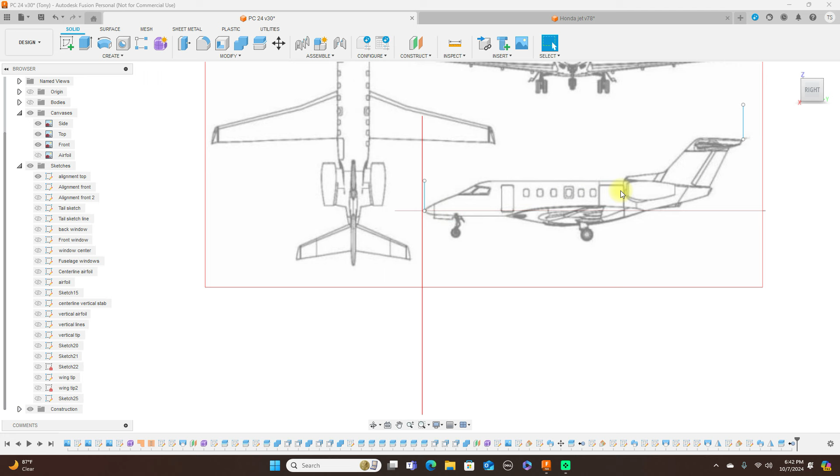Today I'm going to show you the way that I align my 3-view drawings now, instead of the old way that I used to do them. The old way, I would bring in a picture like this and calibrate the side view. Once I get the side view in here, I would calibrate this, then calibrate the top and calibrate the front. Now I don't calibrate the top and the front, so I'm going to show you how I do that.

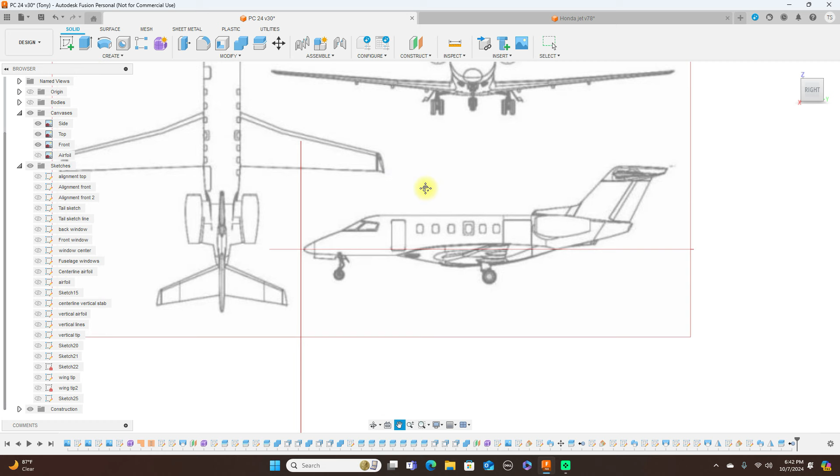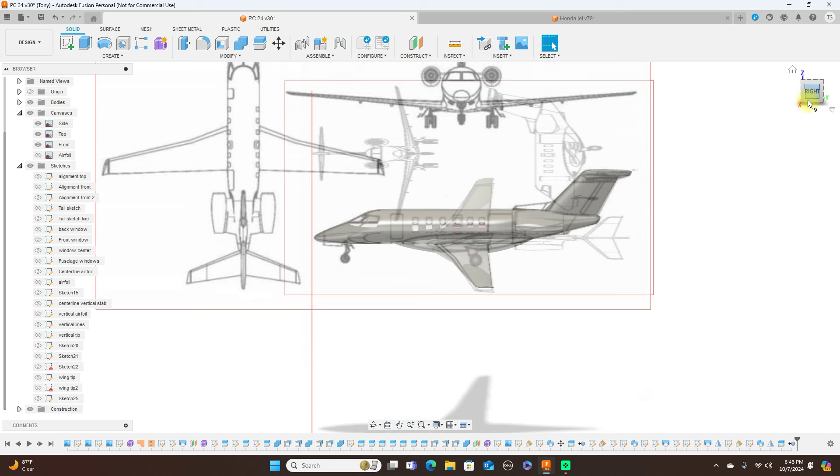Let me show you the difference to being really calibrated, the pictures. Turn the bodies on here. As you can see, this is lined up really well. The top as well, as you can see, is really lined up quite well. And the front. This is the way I do it.

So I turn the canvases off so you can have a look at that. This is a Pilatus PC24 that I've been working on. But anyway, let's go ahead and open up something new here, a new design.

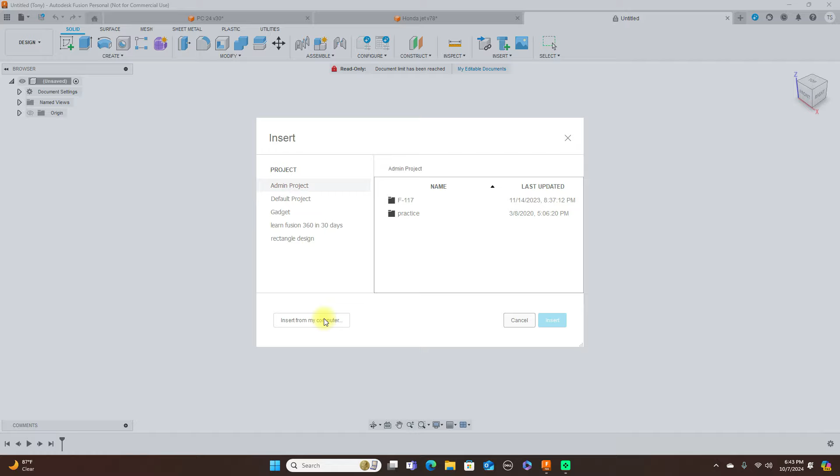And I'm going to insert a canvas here, and it's a picture on my desktop. Let's go ahead and find one to use, something that's not difficult. Let's go ahead and use this A380.

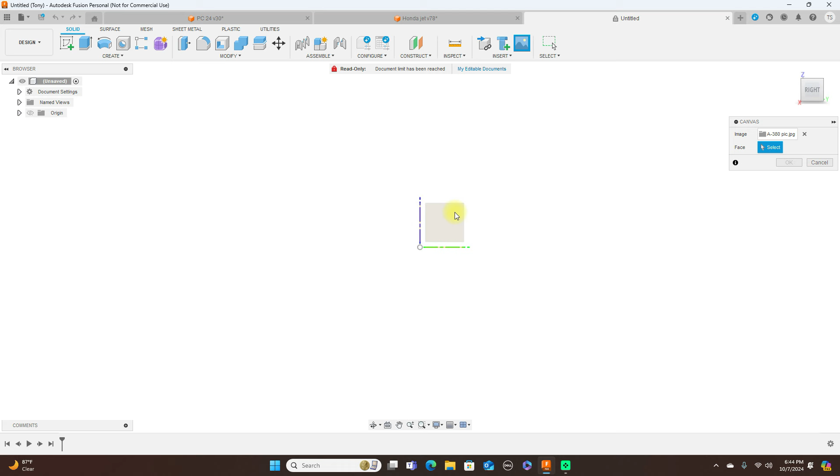And put this on the side view here, and click OK.

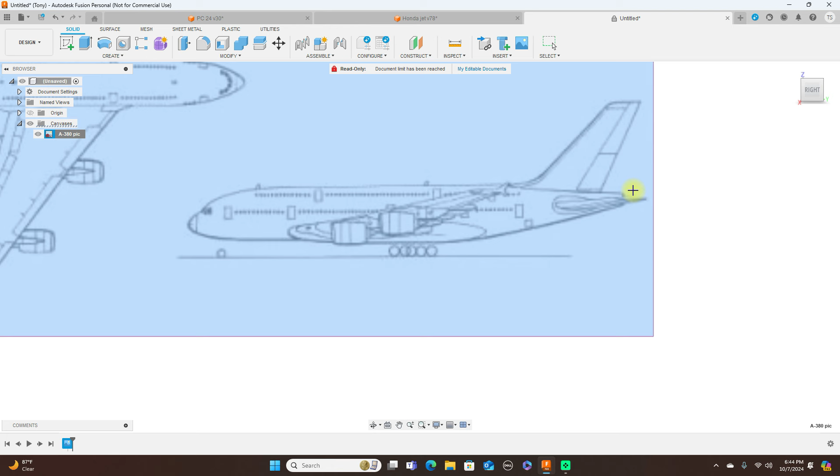Now what I do is calibrate this picture here. I want from here to here to be 2 meters. Actually, I want from here to roughly around up here.

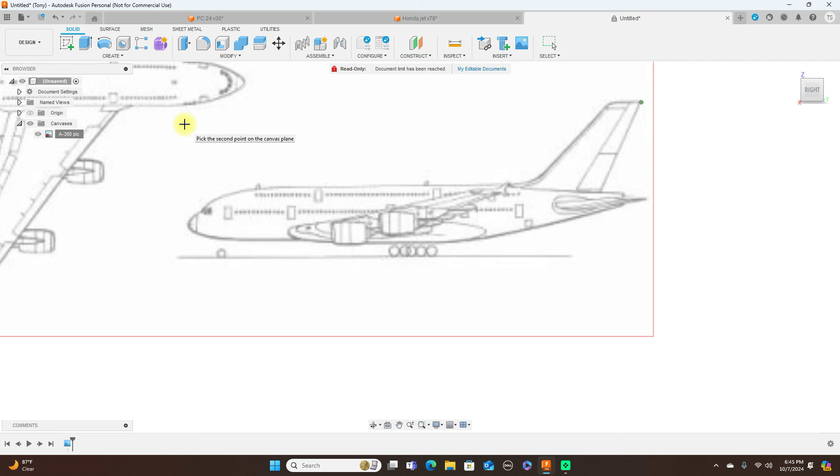You change this, cancel this, do this better. Now I'm going to use this point here and this point here.

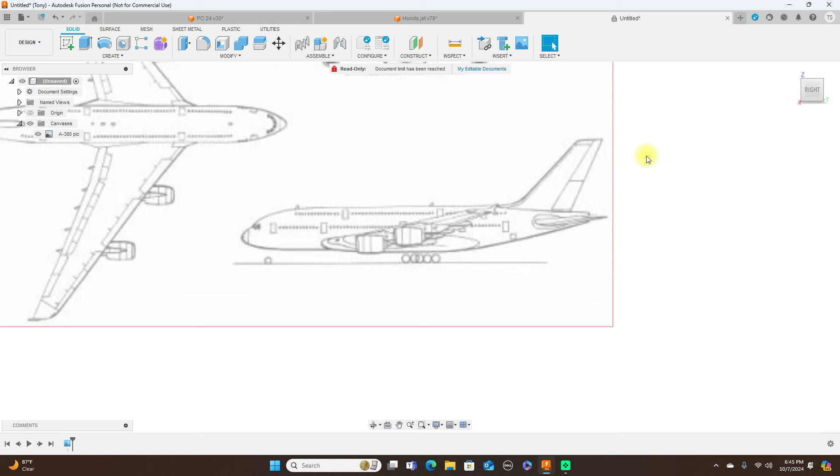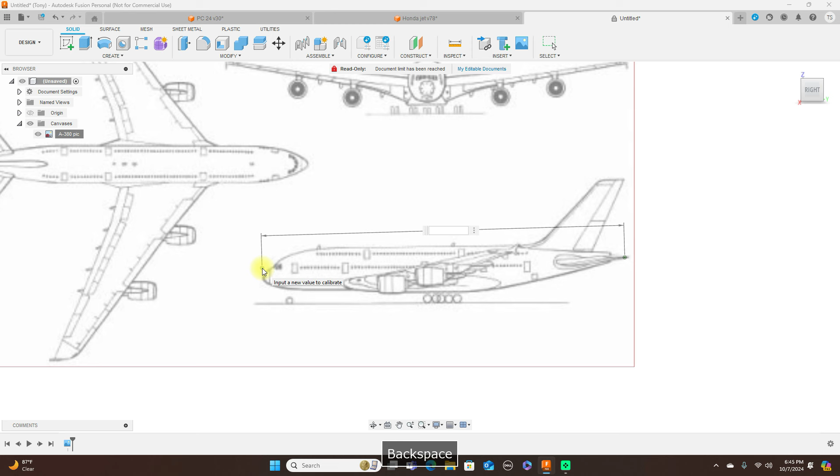And the other parts of this doesn't really matter too much. If you need this to be exactly 2 meters, put some lines in here to make sure it's exactly 2 meters long. But that's the only one that needs to be calibrated, just the first side profile. Just calibrate that.

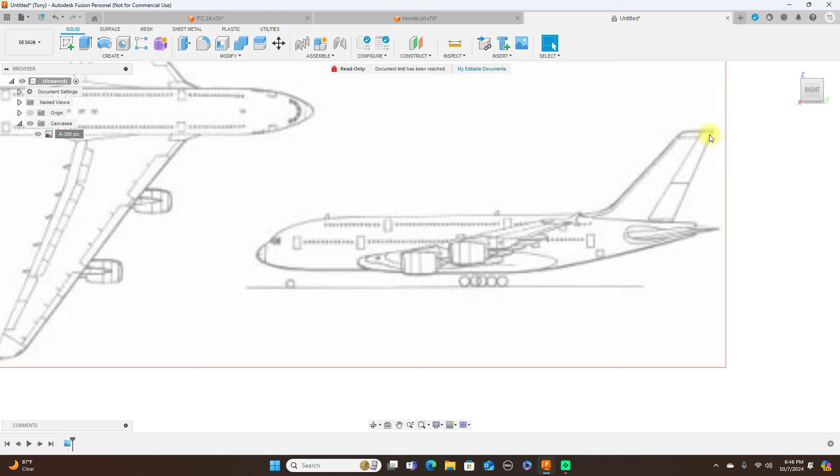Now you have that in here and it's calibrated to be whatever size you need it to be. Now what you do is create a sketch on the side plane here.

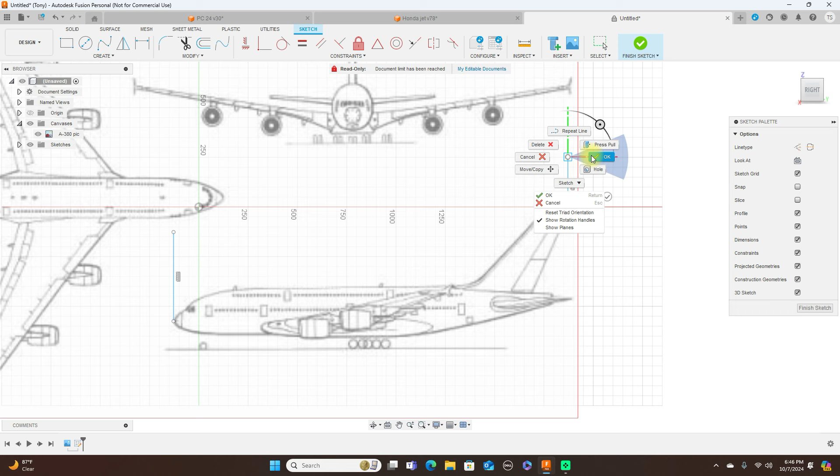Then I'll draw a line from here to here, and I'll do the same thing for the back. As you can see, we have the line that we need.

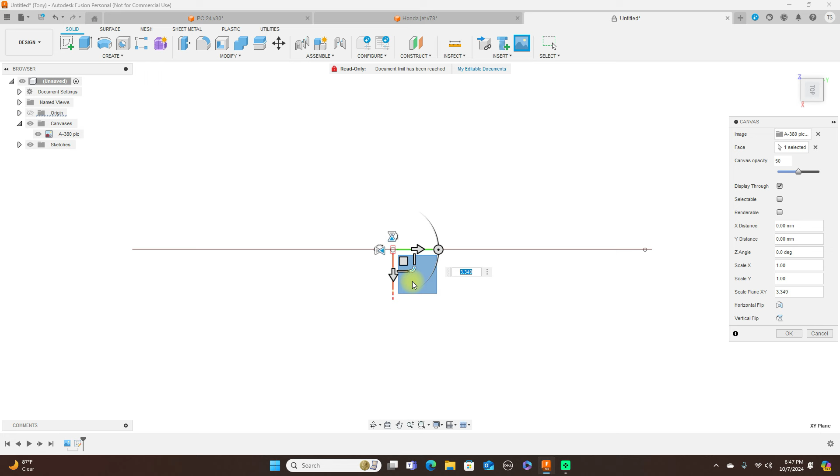Next, I'll go to insert again, another canvas, and that same picture that we used. And drag this out, rotate this.

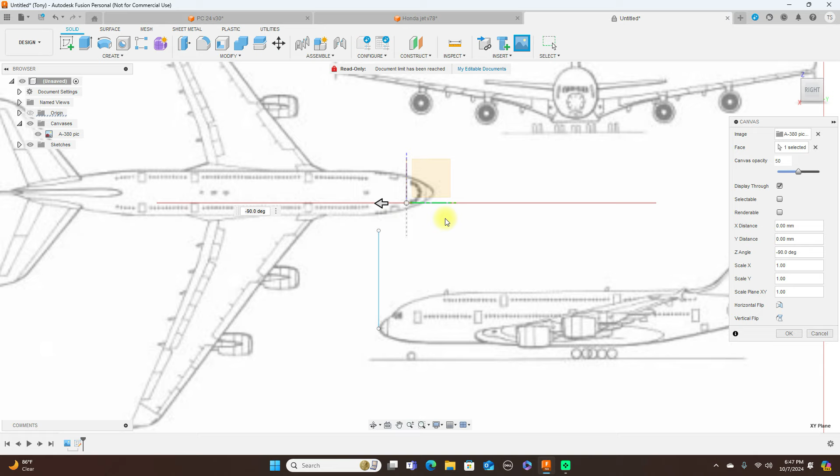And we have a line from here to the back end of it, to there, and there. So that dot and the dot up front.

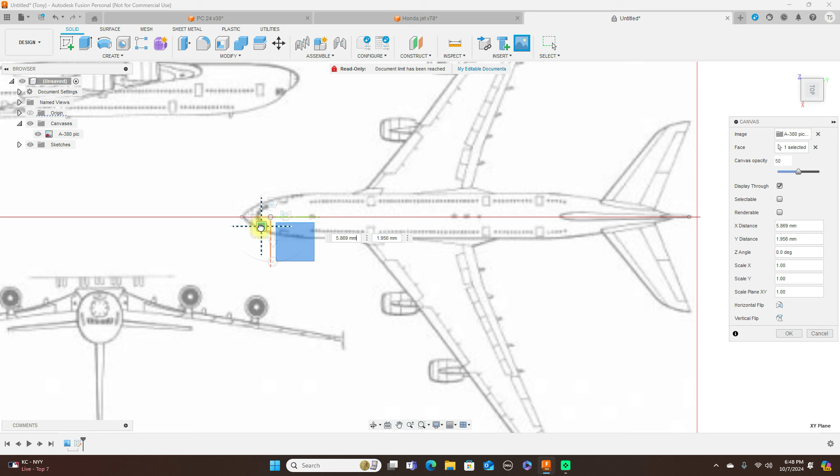And I'll pull this out here and line it up, the two dots there. And click OK.

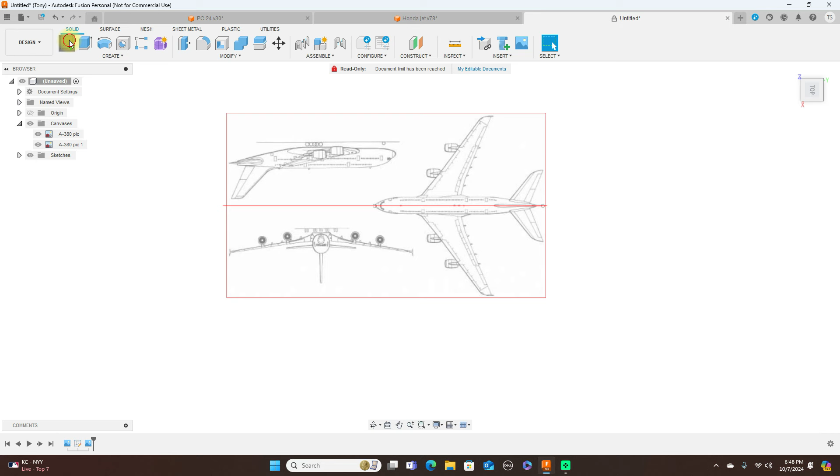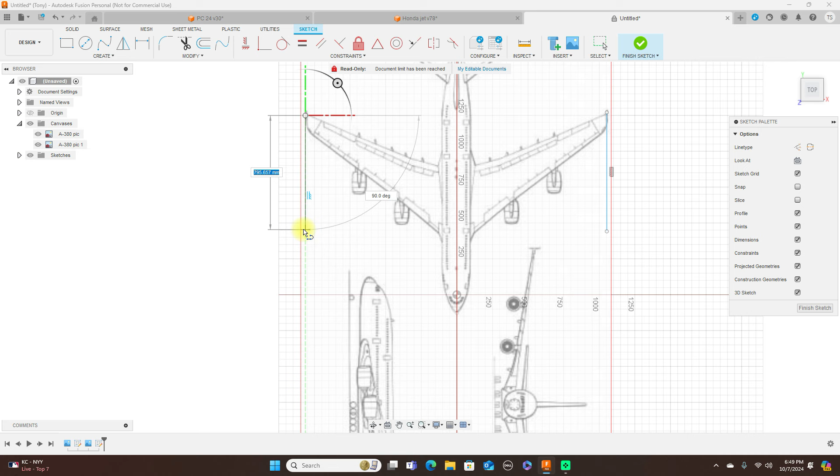Then the front one, while we're looking at the top here, we'll create a sketch on this plane. Again, line, wing, and the same on the other side. Finish sketch.

Look at this from the front, and we have our two dots here. Now we'll insert another canvas.

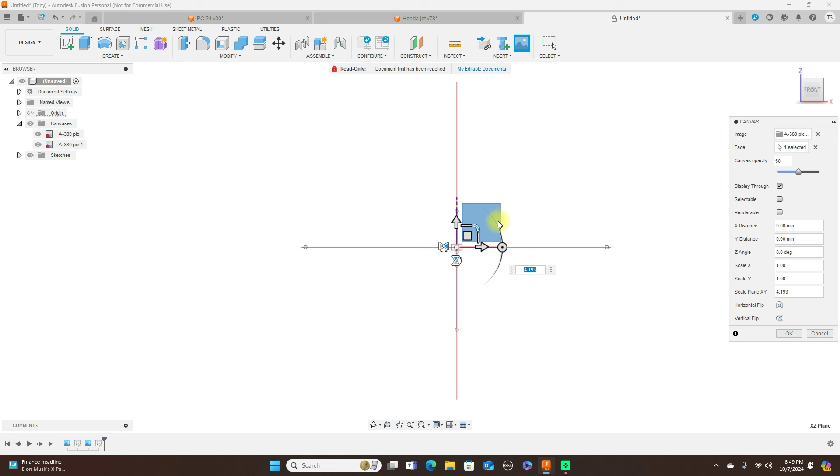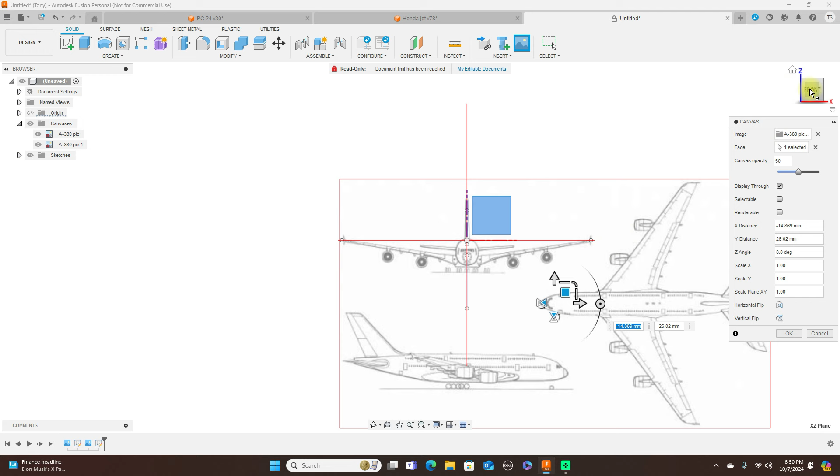This plane here. And that's really close. And then lining it up as far as height.

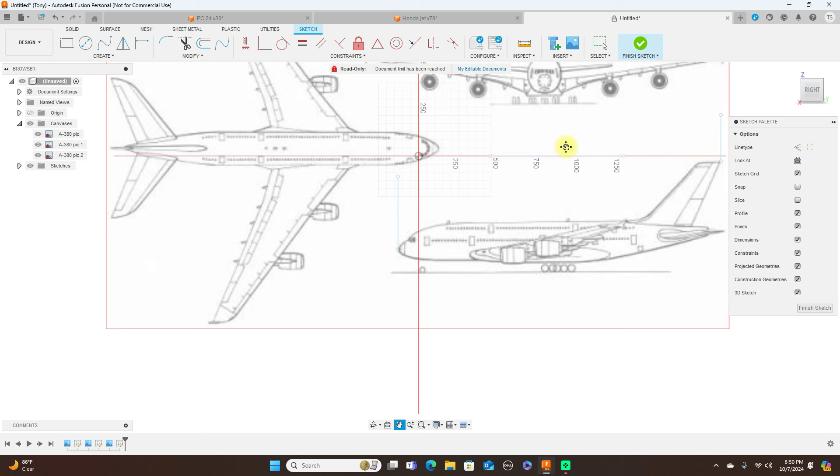Come back to the side view and create a plane on the sketch here. And I'll just use these wheels here, and do a line here.

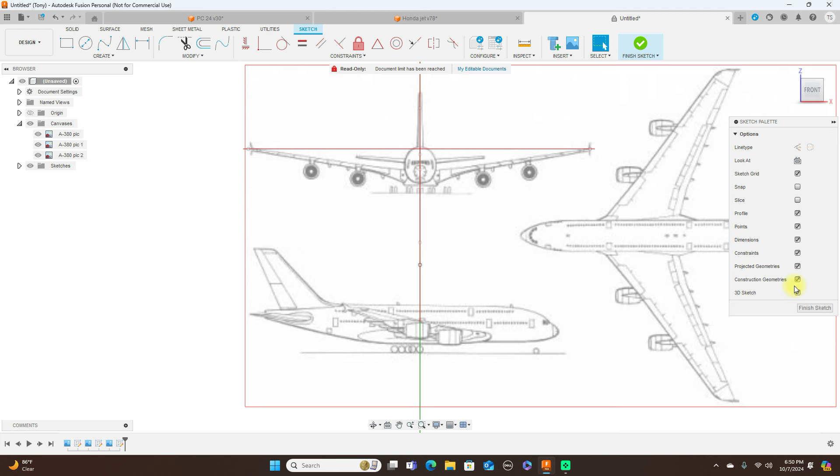Now we know it needs to come down here, for the wheels to touch. We'll go ahead and finish sketch here, and that front pic, edit.

Now this way can take a lot longer to get everything lined up, but it gives you a little more accuracy.

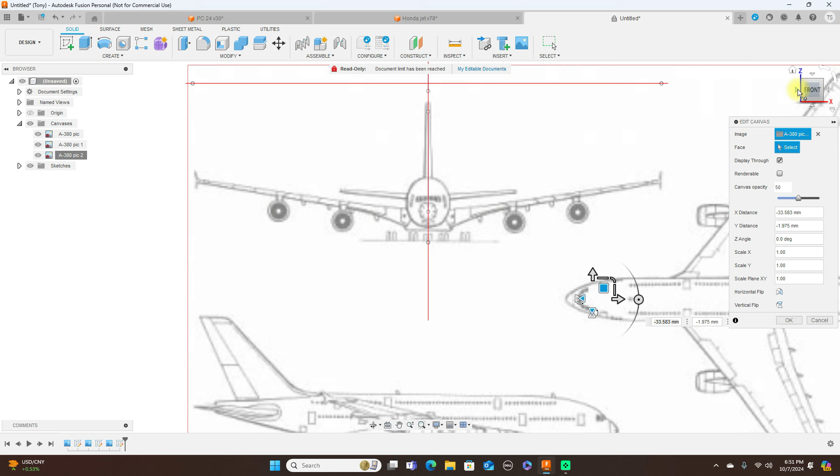And so we have that. Now we can see how things actually line up now. So we have this. Turn off those sketches, and what I'll do—

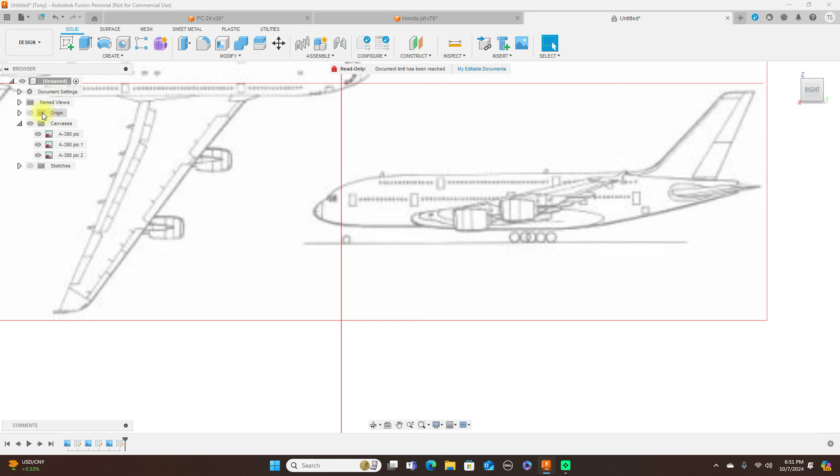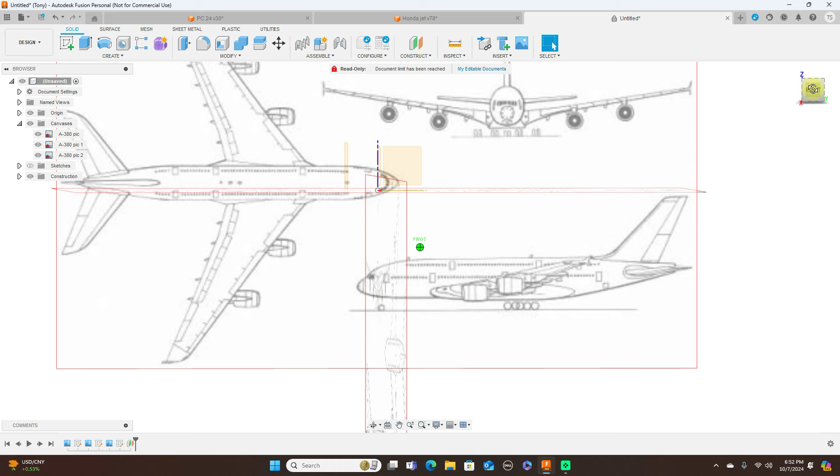I need to do an offset plane because I want to start this up here. Now create a form, cylinder, on this plane here.

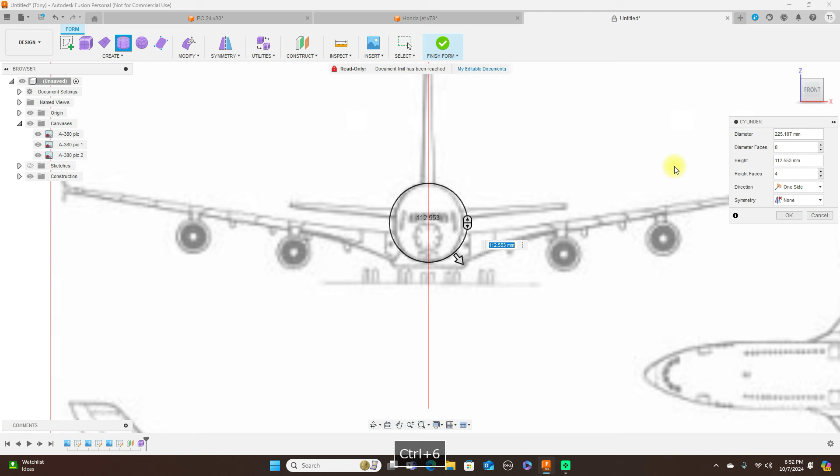Pull this back. And I'm not going to model this airplane, just wanted to show you guys how I do this now, and it gives me much better results.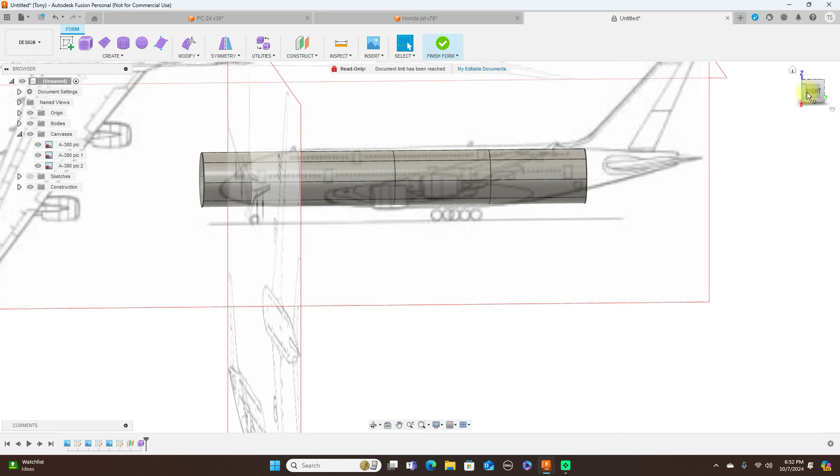Now, as you can see here, the alignment on this is really well now. From the front like this, and from the side, as you can see.

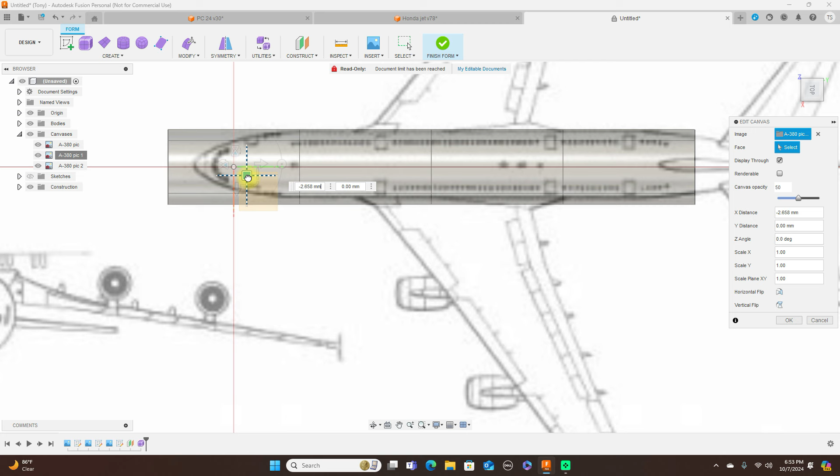Now the top here is slightly off, you see this is not centered properly. So I would just come up here and edit this and move this down slightly. Or excuse me, up... or down, I'm sorry. And get this better lined up. And there. As you can see, the distance between the sides here, that's fine too.

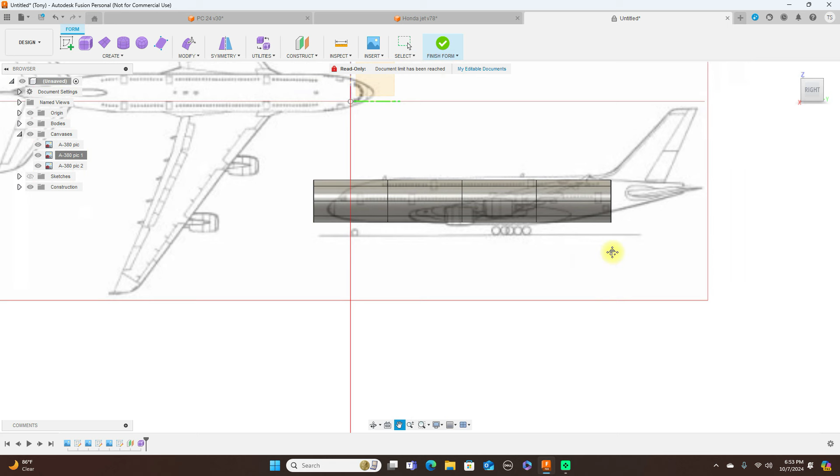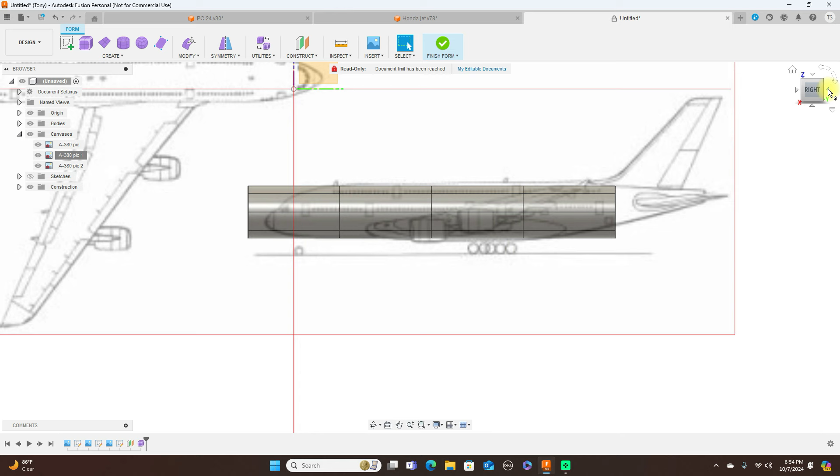And like I said, doing it this way, things line up so much better for me now, and this is how I do this. Instead of calibrating 3 pictures, I only calibrate 1, then draw the lines to get this. So this is my workflow for this now. And as you can see, this is what I did with this PC-24 with the lines.

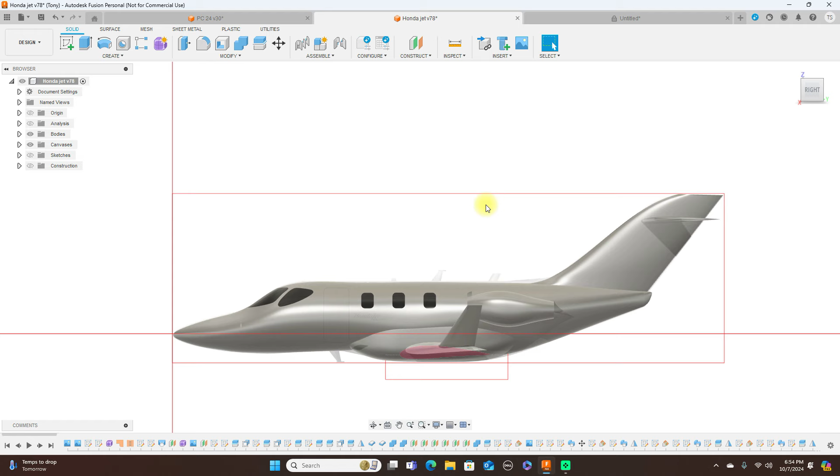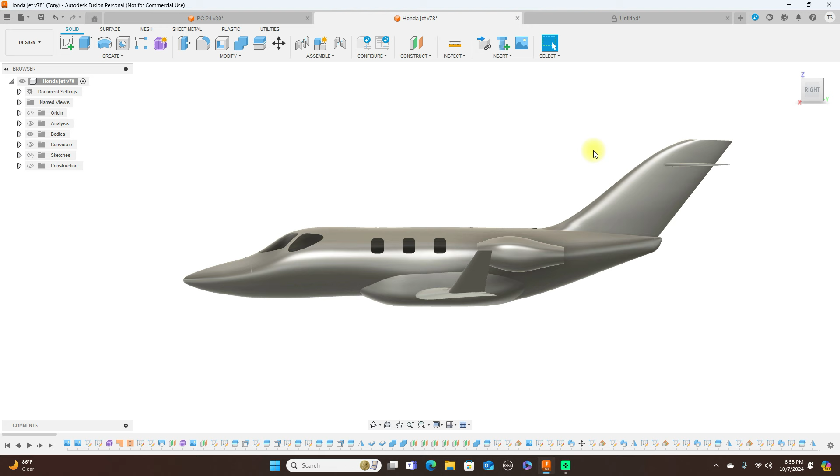Now, when I was modeling this, I modeled this last year sometime, this Honda Jet, and I didn't do that. I didn't line it up that way, but I had really good 3-view drawings for this. Also, one thing I forgot, when you're modeling, you want to find the best drawings that you can get, because there's a lot of pictures out there on the internet where the side, front, and top views aren't properly drawn to scale, and that can screw things up. But I find that when that happens, the way I showed you guys, putting the pictures in like this, I get much better results.

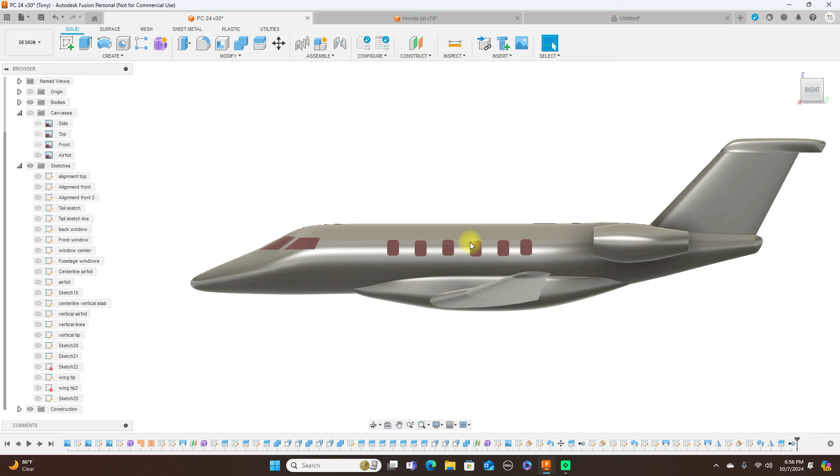And also my workflow—oh, I don't want to cancel this. My workflow, like for this Pilatus PC-24, if you notice on the tree over here, everything that I do now, I label everything. Before, I would do the top, side, and stuff like that. And now I even label my sketches, because now I can come back and find something really quick. If I want the back windows for the flight deck up here, I just come back here and there it is, and the front windows for it, and then the windows here in the center, etc. So it's just easier labeling everything, all the sketches, so I can find something really quick. It's just easier finding things.

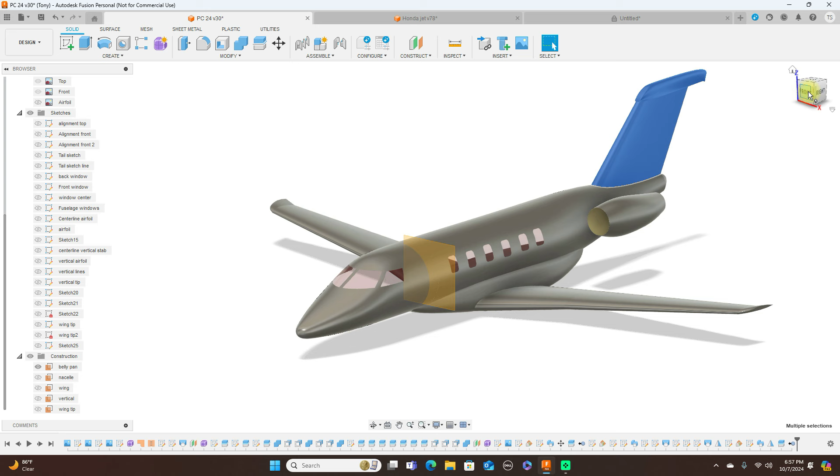Even my construction planes, I labeled them as well. Like when I was doing the belly pan, I put an offset plane right there to get this. So if I needed this plane for something else, I can easily come back over here, click on that, and get right back to it, now that everything is labeled. It takes a little more time labeling stuff, but overall it makes finding things much easier and saves so much more time with everything being labeled.

And yeah, I just wanted to show you guys my new workflow for lining pictures up, or 3-view pictures, to model from. And again, you should really get accurate drawings of airplanes.

And the place now that I look at the most to get accurate airplanes is called the-blueprints.com. And they have thousands upon thousands of pictures. If I'm modeling an airplane for somebody, normally what I do is go ahead and buy the blueprints and model it using those blueprints from that company. I will just buy them. And they also have a lot of free pictures as well that you can use to model—well, 3-view pictures to model your stuff from. But yeah, again, that's the-blueprints.com, go over there and have a look.

So that's going to do it for this video. Just a short video of my new workflows for aligning pictures and everything, and my tree over here and stuff. So yeah, I hope you liked this video.